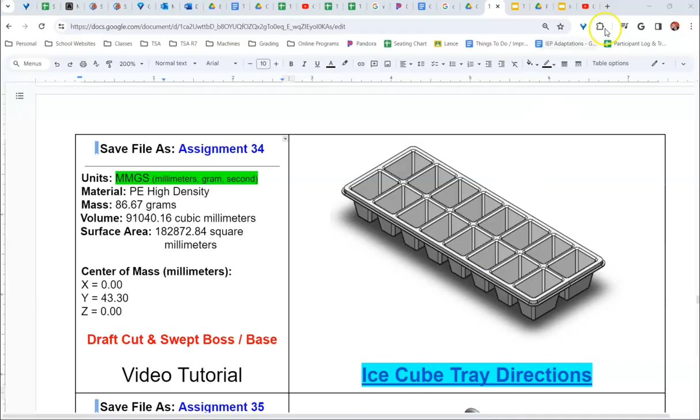First off, we're going to make a new part in SolidWorks, and this part is going to be in millimeters. We're also going to change our material right away to make it out of the material that most ice cube trays are made out of, which is PE high density, polyethylene high density plastic.

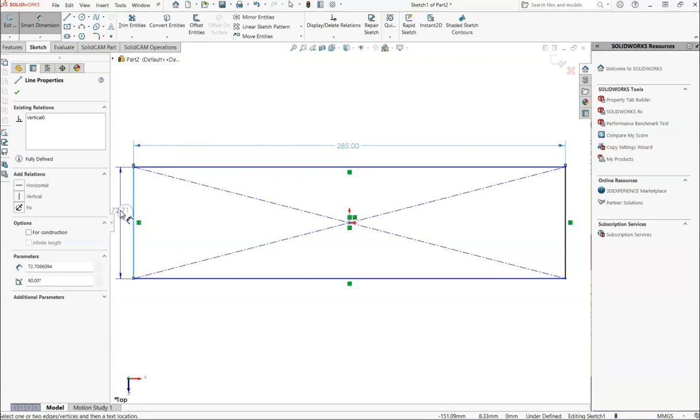Now we're going to be sketching on our top plane. We're going to use the center rectangle tool, click on the origin, and dimension this to 285 wide by 105 tall. Again, all numbers and measurements are from the video that I found online.

Now we're going to be extruding. We're going to go up, and that's going to get extruded up 60 millimeters.

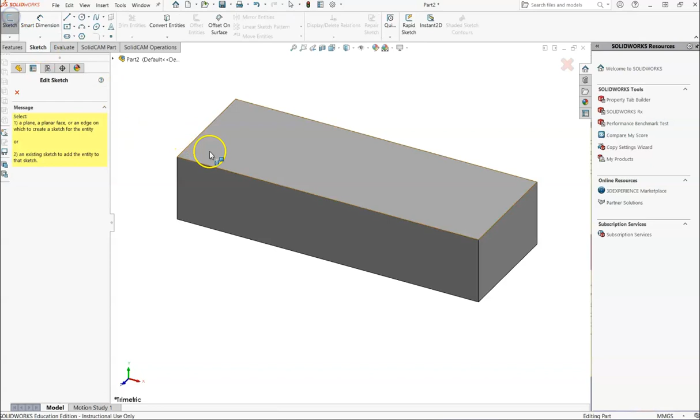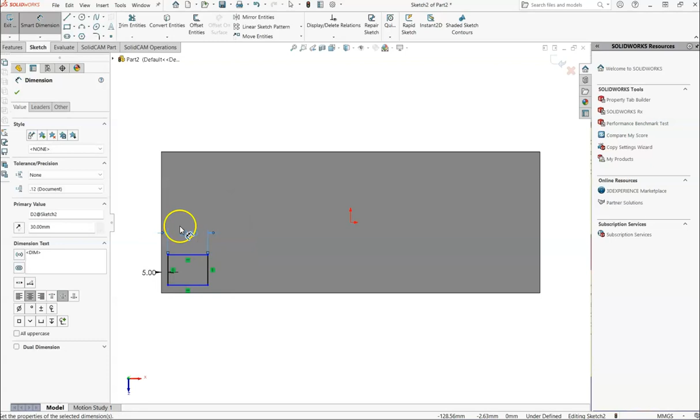Here we're going to sketch on the top surface. I'm going to use the rectangle tool and make a little rectangle in the bottom left-hand corner. We're going to dimension that from the outside edge to the first edge at 5 millimeters, and 30 millimeters this way, actually vertical. Sorry, I pulled my rectangle out to the side a little bit longer. This is going to be 45 tall, which shapes it a bit, so we need to slide this up from here to the bottom edge, which is also going to be 5.

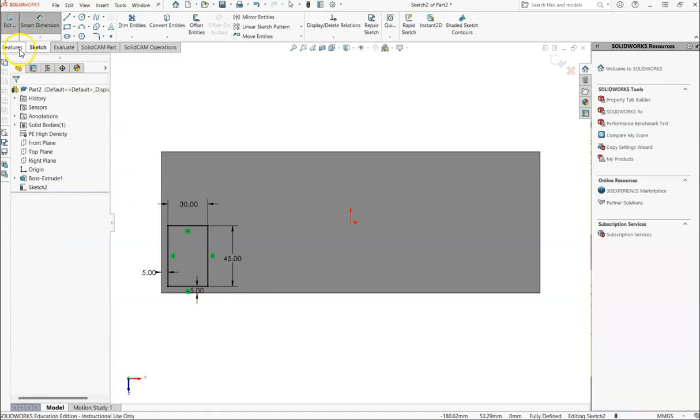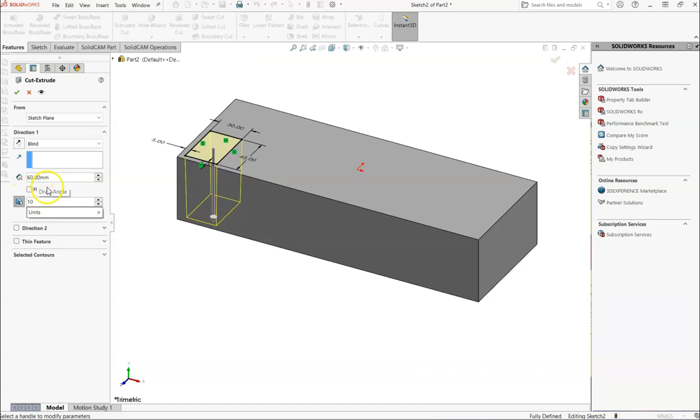Now we're going to go to the Features tab and hit Extrude Cut. We're not just going to cut it straight down - an ice tray actually goes down on an angle so that they can stack inside of one another, and that is called drafting. On the left there's a draft on or off button, so we'll click to enable it. This is going to be drafted at 10 degrees, and we're going to cut down 35 millimeters. As you can see, it cuts down on an angle.

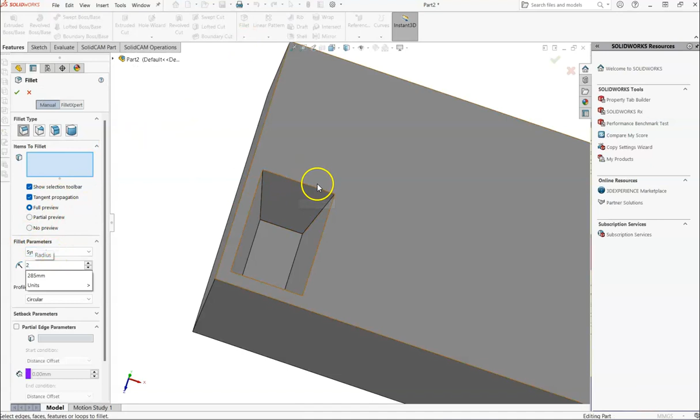Now from here, we're going to fillet all those inside edges. We'll get our fillet tool and set the fillet to 2 millimeters. Since we want every edge on the inside, including our edge, it's much easier if you just click on the surfaces. Even by clicking these four, it's going to do the bottom, so there's no point in even clicking on the bottom surface. You can check.

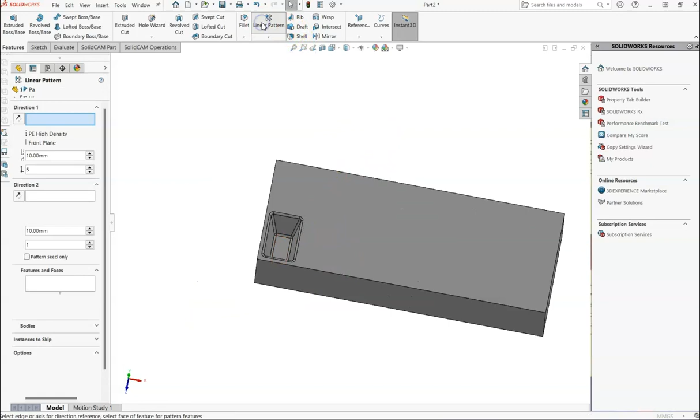Now from here, we're going to linear pattern this, so go up to linear pattern. My first direction is going to be this left side, and my arrow is pointing down, so I'm going to reverse that so it's pointing upwards. What I want here is spacing of 50, and this is just going to be 2. My direction 2 is going to be this edge, going sideways - you shouldn't have to change your arrow. Spacing here is 35, and we want 8 of these.

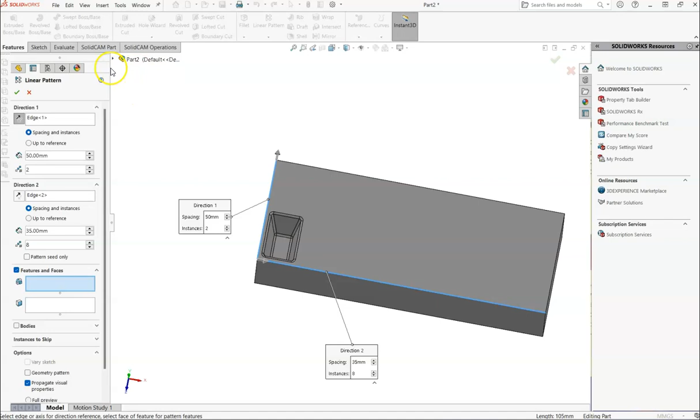Down here where it says Features, if we click in that box, I think it's easier if you just click the drop down. We're going to do the cut fillets, click the green check, and you can see we have all the features applied.

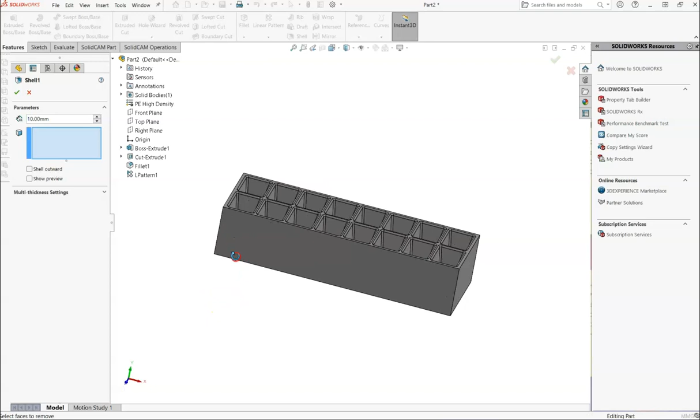So from here we're going to do something interesting with this shell. The shell itself, you'd think, well, we're not really making anything. Well, this is going to be interesting. Right now it's kind of a box.

We are going to be doing all the outsides. We're going to leave it with a wall thickness of 1, so we're going to change this to 1. I'm going to select all 5 outsides, rotating around, including the bottom.

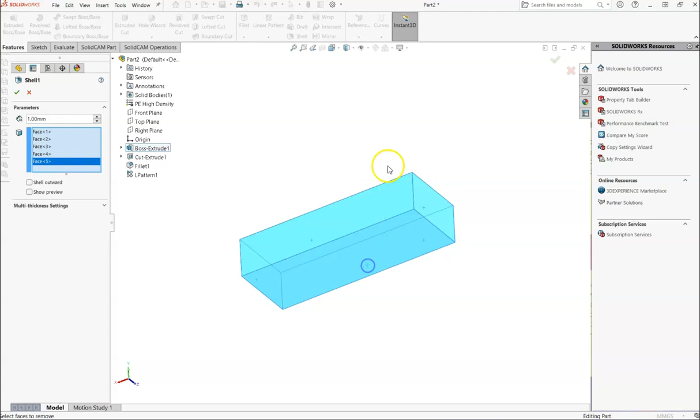I'm going to remove all of those sides up until the bottom of these pieces. Okay? And that is a pretty cool shell.

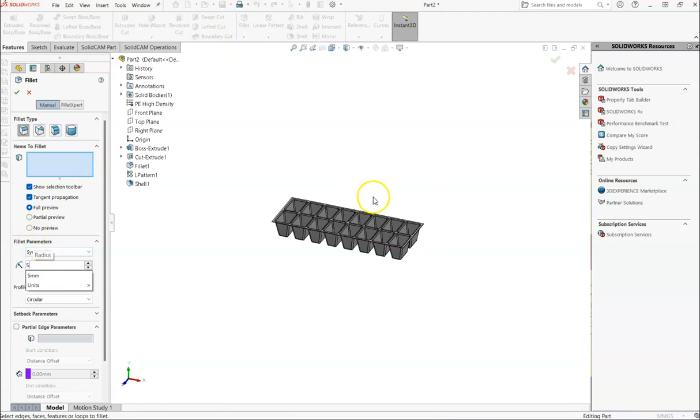Now we're going to fillet. Get your fillet tool. We're going to be filleting at a radius of 5. I'm going to zoom in, and we want all 4 of these corners, just so it rounds those corners. Okay, green check.

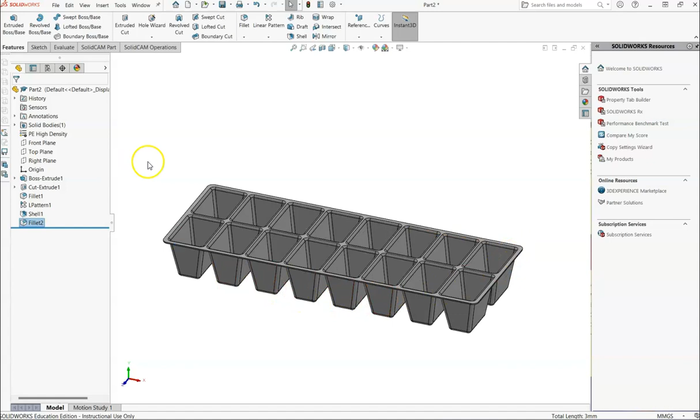Now from here, we're going to be sketching on the top surface. Sketch on this top surface, and what we want is this outside surface. We're going to be making that little lip on the outside of the ice cube tray that allows you to easily grab it and separate it from the previous or lower ice cube tray.

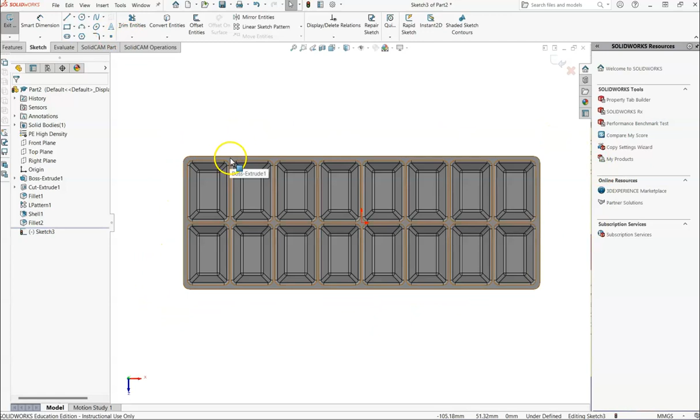So what we're doing here is making a path. Later we're going to profile and sweep it. We want this outside edge. Now you could use different tools to sketch the thing itself, but if you actually select that outside, select the top surface itself, and convert entities, it's going to trace perfectly just the outside. It won't do all these fillets since that was a different feature, but if you select just the top, it'll trace the entire outside. So that is our path.

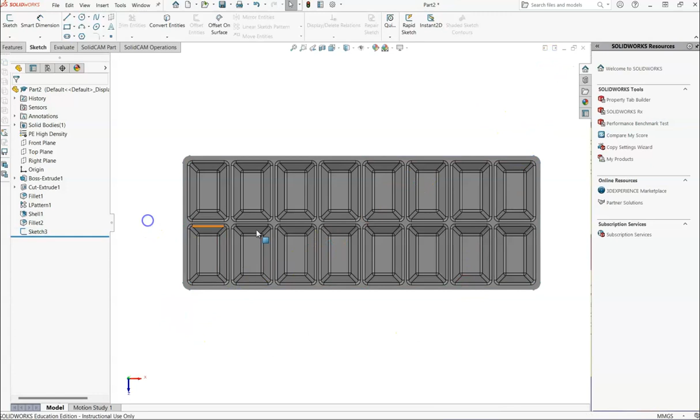Now I'm going to hit return, and we want to put a profile on this. Now because this has a corner, we can't just sketch right here on the front. We're going to sketch somewhere on that path, and where we'll start is actually on the front plane. Get your sketch tool, select the drop down, and the front plane cuts right through this. So no need to make a different sketch. Sketch right on the front plane.

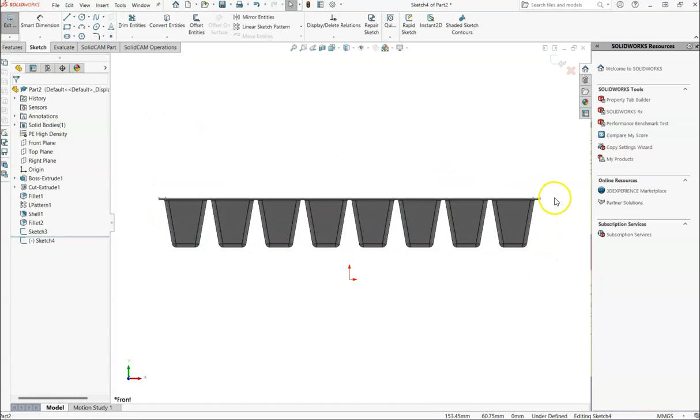I'm going to zoom in over here on this right side, and I'm going to use the line tool to sketch out my shape. Here you can see there's a gray line with a gray dot. That's our path sketch, so we want to be selected to start so that we're actually connected to it. We're just going to go down, over, up, to make this little lip.

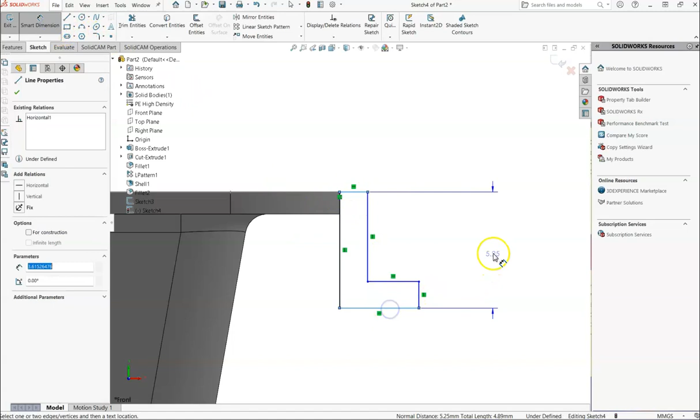Go ahead and dimension. We're going to make this 5 tall altogether, 3 wide, and this top part 1. And this is blue right now.

That's fine, so I'm going to fillet these 2 corners. I'll get my fillet tool and say 0.5 — that's going to be the inside one. Then I'll make this one 1.5, the outside one. And it's still blue. This and this top part are going to be equal to one another, so in other words, that's also 1.

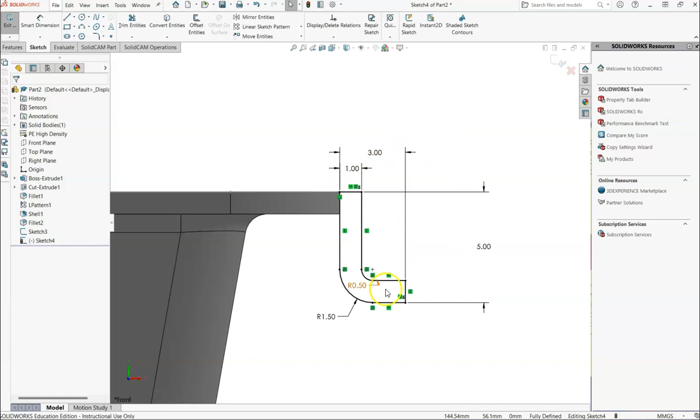So now my path — from here, I'm going to go to the Features tab. I'm going to hit Swept Boss/Base, and it's asking us for a profile, which is this sketch, that's sketch 4, and the path, that's going to be sketch 3.

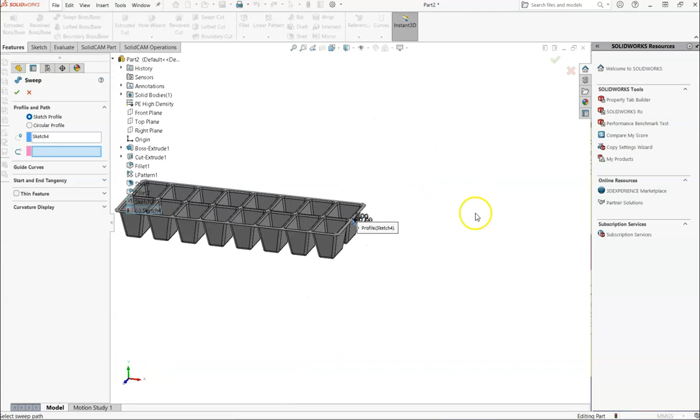So if I just rotate, you could probably just click on this edge. Just for safe measure, I'm going to hit that drop down, and select sketch 3 with the green. And there you go. There's our lip. Tray.